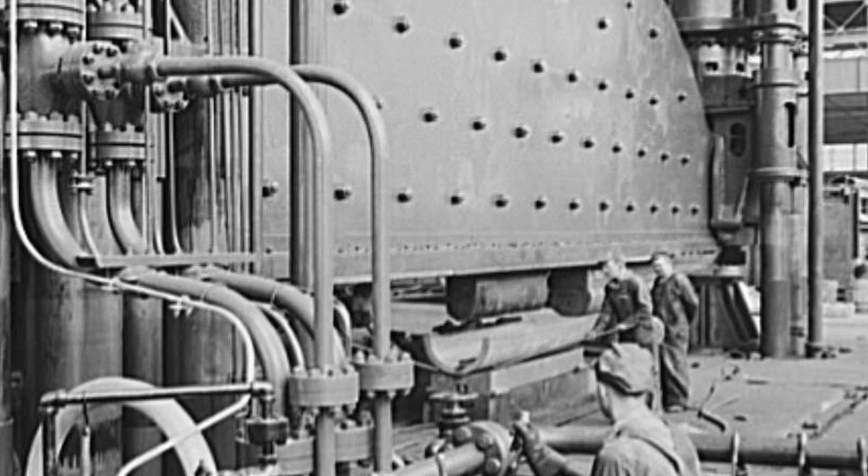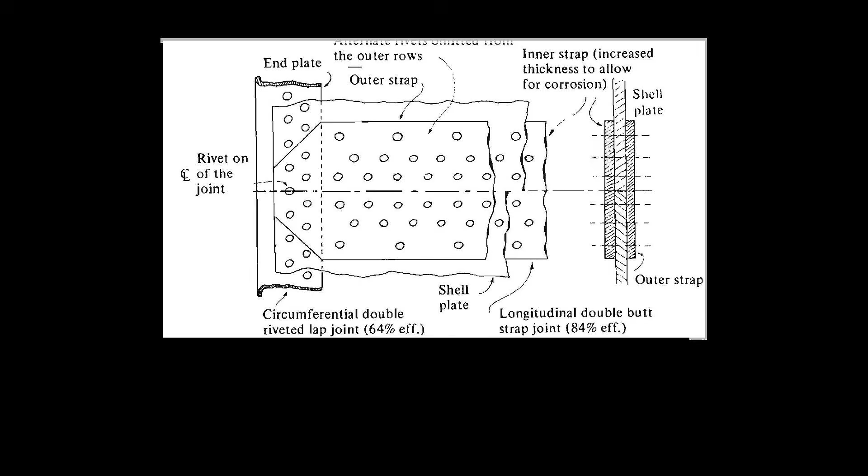He was a careful man. His wife would later tell investigators that he had been irritable for days because he was being forced to operate a boiler he did not trust at a pressure it was unequal to. The factory's newer boiler was down for routine maintenance, and Rockwell had been ordered to bring the old backup online—a 17-foot steel cylinder built in 1891 with riveted lap joints that hid their age between overlapping plates of metal.

He had lit the coal fire the night before, brought the boiler up slowly, and by early morning it was heating the building for 400 arriving day shift workers. At 7:45, the plant manager called Rockwell's office to report strange noises in the radiators along one wall. Rockwell had just stepped out. His assistant told the manager everything was fine.

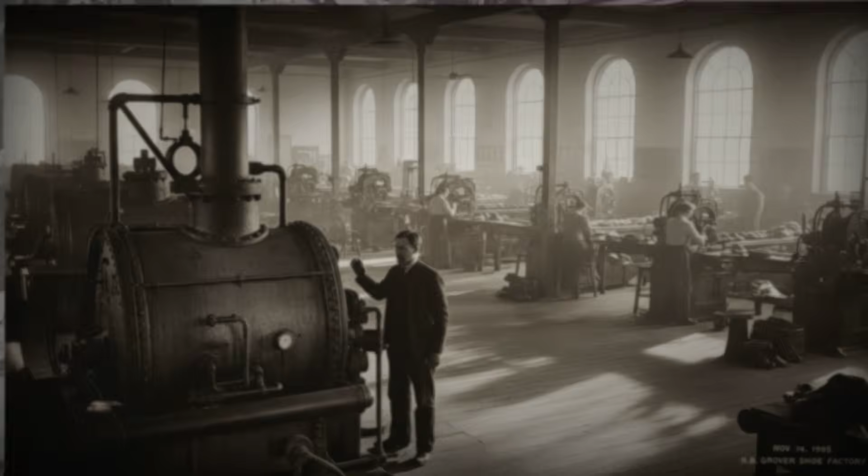A few minutes later, the boiler exploded. It rocketed upward through 3 floors and the roof. It struck the factory's elevated water tower on the way out, and the full tank crashed back through the building, collapsing the rear portion of the 4-story structure. The floors pancaked. The walls fell inward. Workers were pinned beneath broken beams and thousands of pounds of shoe manufacturing equipment.

Burning coals from the boiler's fire pit showered the wreckage, igniting broken gas lines. 300 windows, blown out by the blast, created a chimney effect that turned the ruins into a furnace hot enough to melt iron pipe. Then the naphtha exploded. Barrels of volatile industrial solvent stored in a wooden shed behind the boiler house detonated in a second blast, throwing sheets of flame across the debris and driving rescuers back.

People half a mile away could hear the screams. 58 people died. 150 were injured. 36 bodies were so badly burned they could never be identified. They were buried together in a common grave at Melrose Cemetery, where the city of Brockton erected a monument that still stands today. David Rockwell's body was found the next day in the boiler house—a charred corpse, a bent watch, 2 rubber heels, and a torn piece of clothing his wife identified as his. He had been sitting near the machine he did not trust when it killed him.

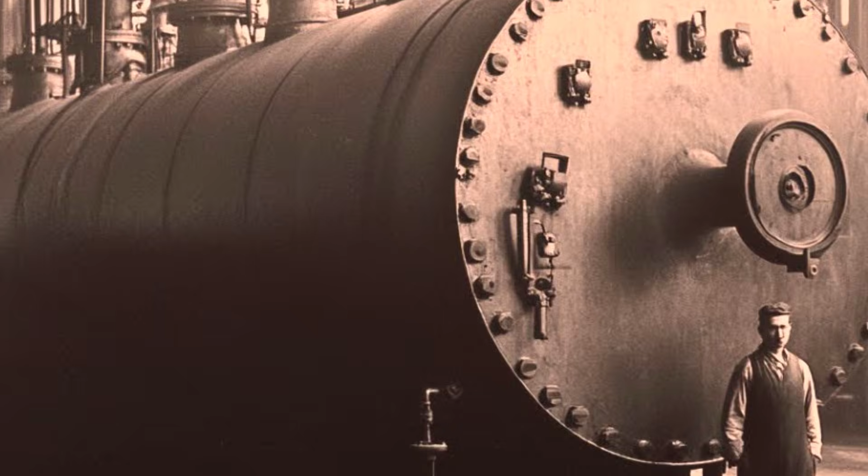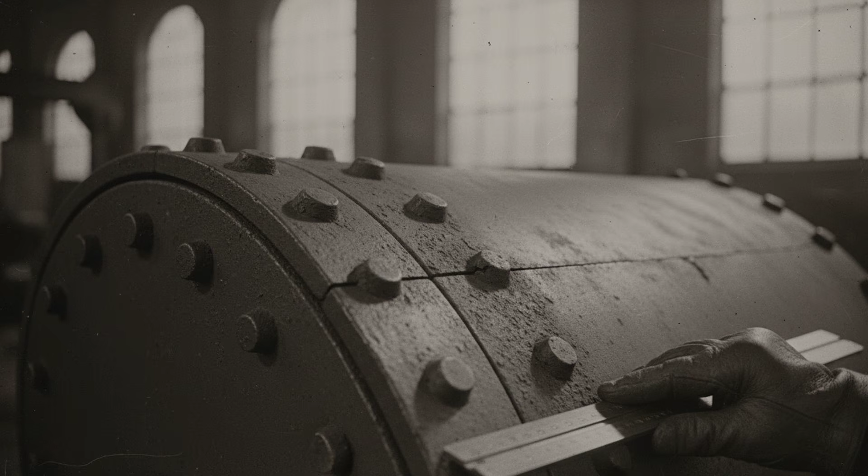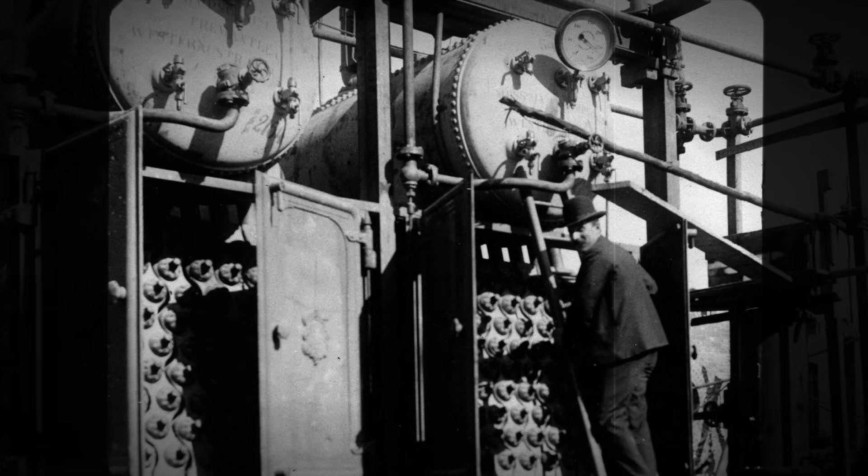The boiler that destroyed the Grover Shoe Factory was not unusual. It was not defective in any way that could be detected by the inspection technology available in 1905. Boiler inspectors who examined the wreckage found a crack in one of its riveted lap joints, hidden between 2 overlapping plates of steel where no inspector could see it. Experts characterized the boiler as old technology with a short remaining service life under high pressure, and then they noted that thousands of identical boilers were in service across the United States at that very moment.

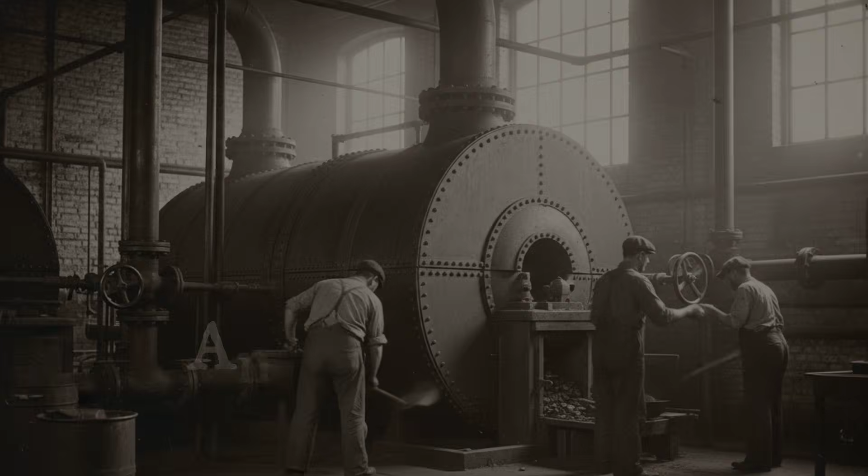The steam boiler is the most prolific killing machine in the history of American industry. It killed more workers than the punch press, more passengers than the Titanic, and more soldiers than most battles of the Civil War. And it did it so regularly, so predictably, and for so long that the people who owned the factories and the steamboats that used them came to regard the explosions as ordinary.

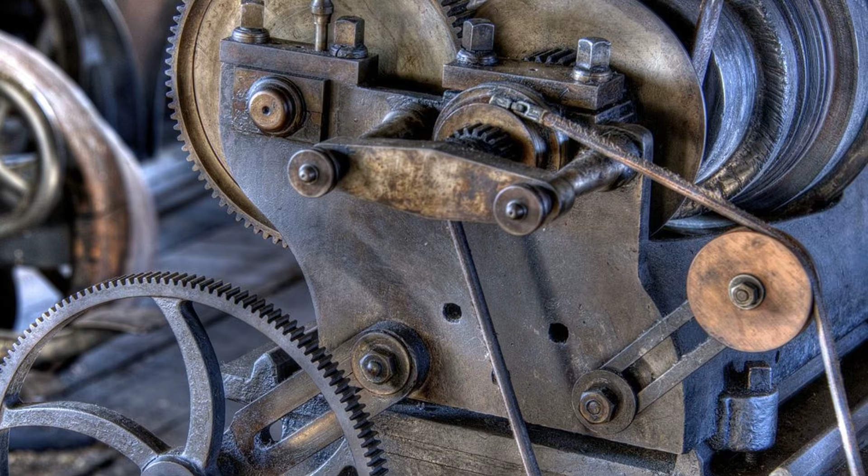Factory owners in the 1850s simply assumed their boilers would explode and that they would lose 1 or 2 workers when it happened. Insurance companies built their actuarial tables around the assumption that boiler failure was inevitable. The Hartford Steam Boiler Inspection and Insurance Company, founded in 1866, was conceived at a time when catastrophic boiler explosions were occurring at the rate of 1 every 4 days, not 1 every 4 months—every 4 days. In 1880, the year the American Society of Mechanical Engineers was founded, there were 159 boiler explosions in the United States. In the first decade of ASME, more than 2,000 boilers exploded.

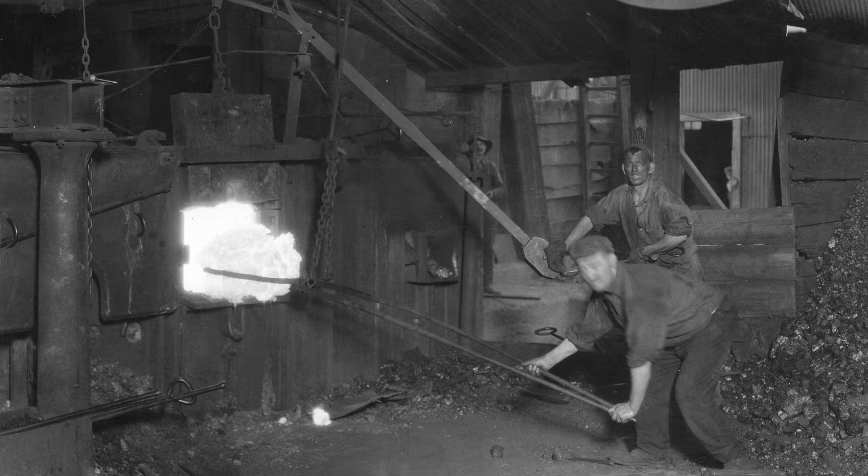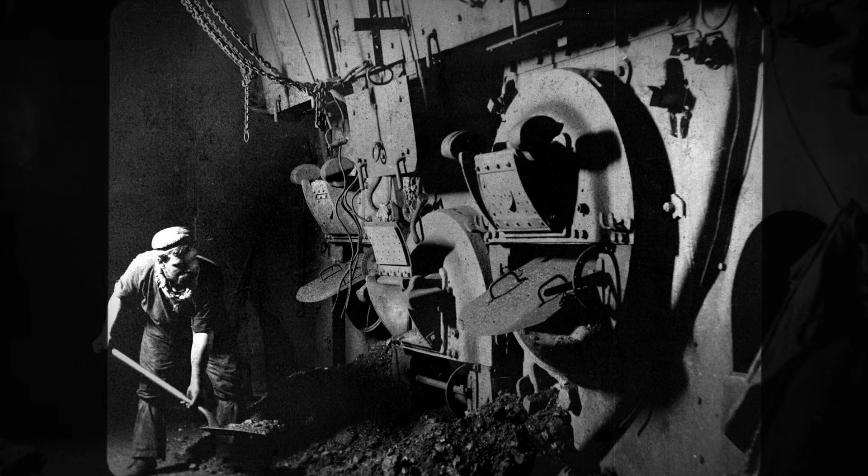From 1880 to 1890, 100,000 boilers were in service across the country, and the explosions kept coming because inspections were rare, construction standards did not exist, and operating guidelines were essentially voluntary. The boiler was not a machine that occasionally failed. It was a machine that was expected to fail. The only question was when, and how many people would be standing near it when it did.

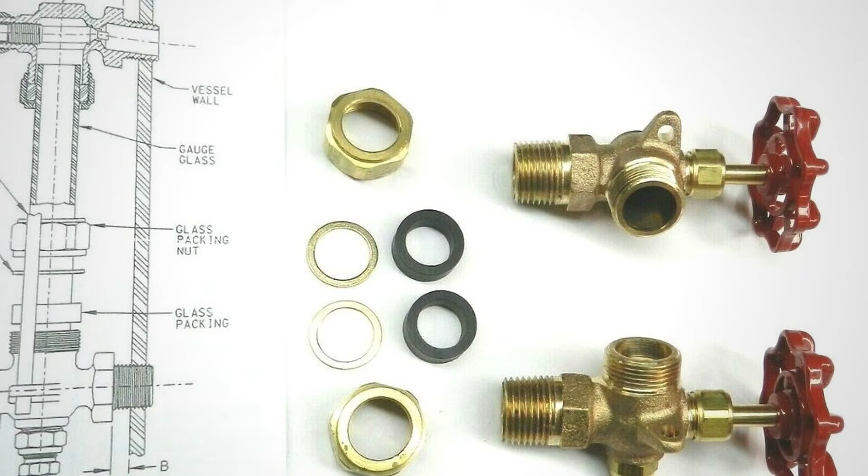To understand why the boiler was so dangerous, you have to understand what it is and what it does. A steam boiler is a closed vessel that heats water under pressure to produce steam.

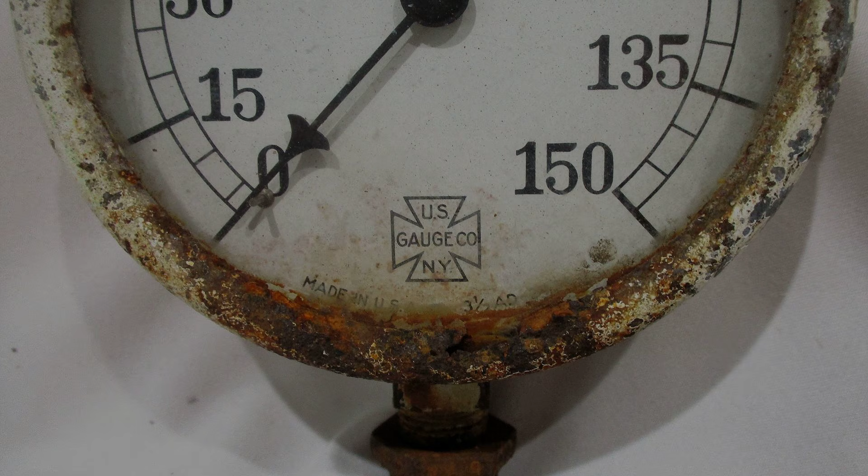The steam drives a piston, turns a turbine, or heats a building. The principle is the same one that makes a tea kettle whistle, except that a factory boiler operates at pressures between 40 and 150 pounds per square inch.

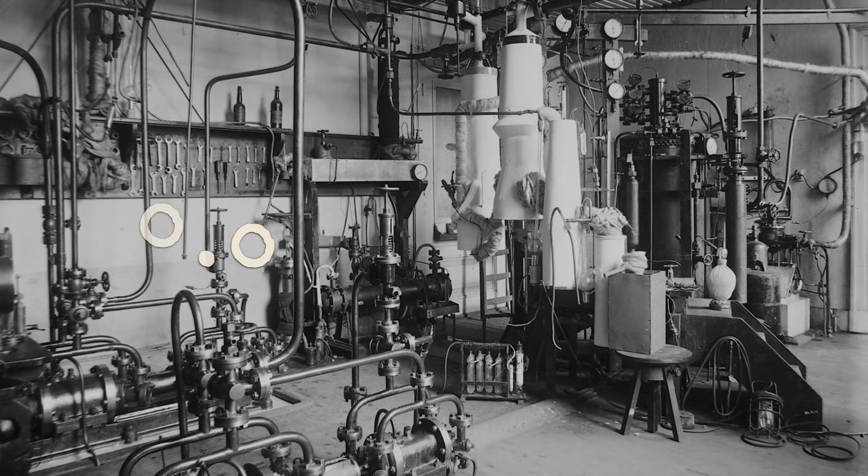The vessel contains hundreds of gallons of water. The water is superheated well above its normal boiling point, and the energy stored inside is equivalent to a significant quantity of explosive. When a boiler fails, the pressurized water instantly flashes to steam, expanding to roughly 1,700 times its liquid volume in a fraction of a second.

That expansion is the explosion.

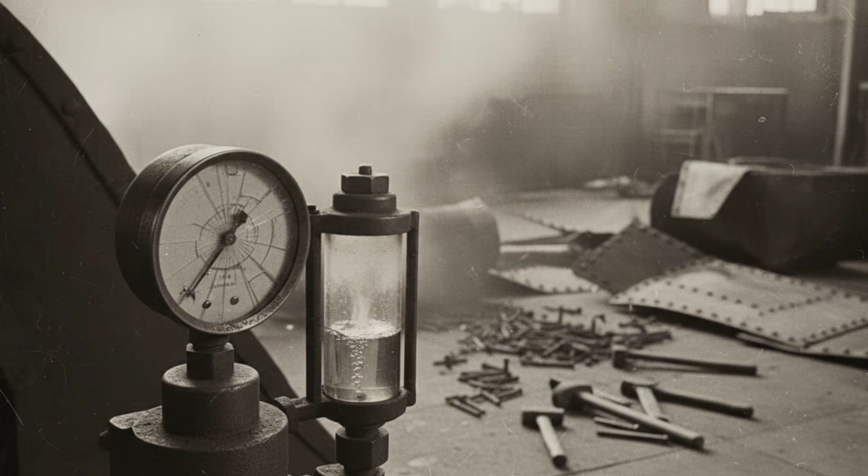The steel shell of the boiler becomes shrapnel. The superheated steam and boiling water become the blast wave. The boiler does not burn. It does not detonate like dynamite. It releases stored energy, and the result is indistinguishable from a bomb.

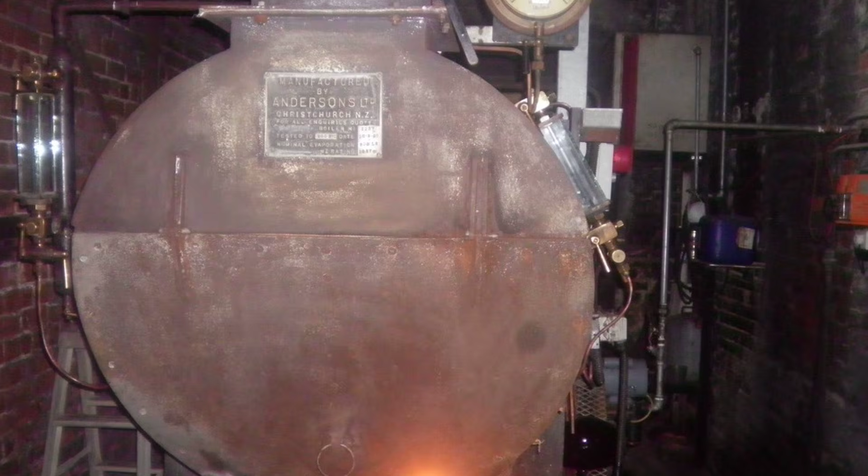Could you imagine standing next to a sealed steel container the size of a small room, knowing that the water inside is being held at temperatures and pressures that would kill you instantly if the metal gave way?

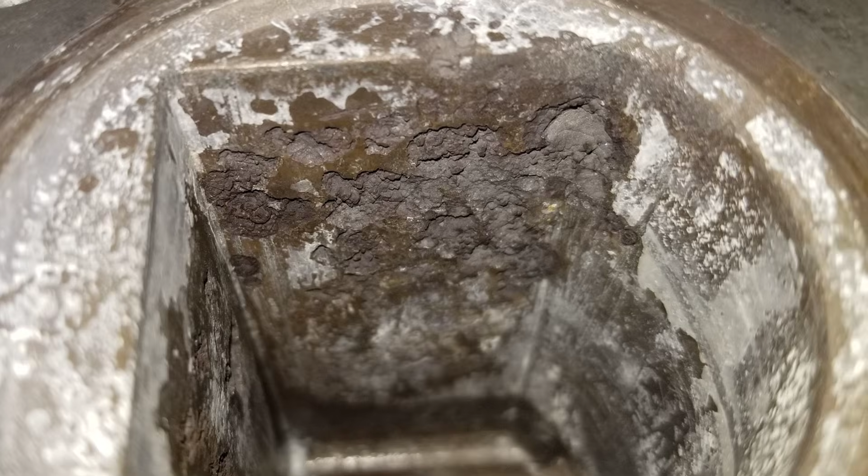The ways a boiler could fail were numerous, and for most of the 19th century, they were poorly understood. The most common cause was simple corrosion. Water inside the boiler ate away at the iron or steel plates over time, thinning them until they could no longer contain the internal pressure.

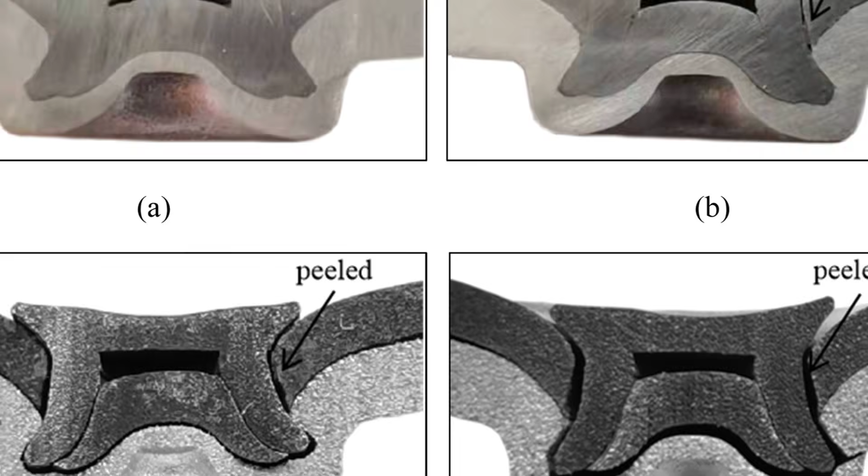But the corrosion was invisible. It formed along the edges of riveted lap joints between overlapping plates where inspectors could not see it. A boiler could pass an external inspection on a Monday and fail on a Tuesday because the flaw that killed it was sandwiched between two layers of metal.

This was exactly what happened at the Grover Shoe Factory. The crack was in the lap joint. It had been forming for years. Nobody could see it until the plates separated and the steam came through.

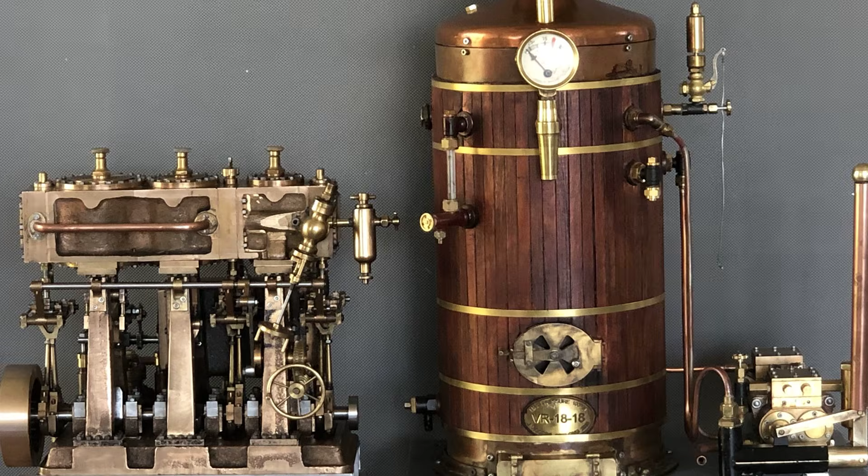Low water level was another killer. If the water inside the boiler dropped below the top of the firebox, the metal overheated. When the feed water pump eventually kicked in and cold water hit the superheated plates, the rapid temperature change could...

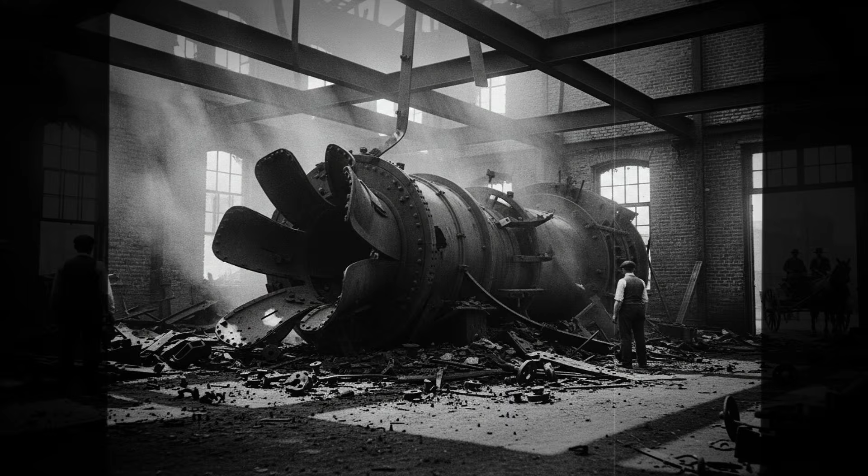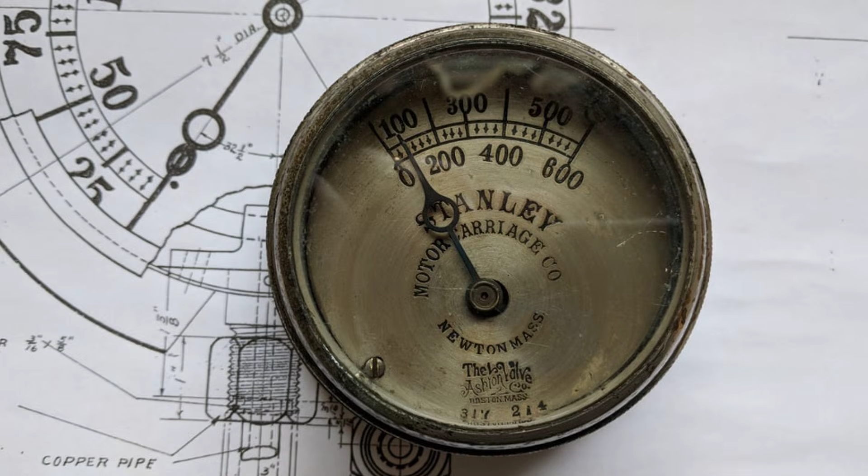crack the metal or cause the weakened plate to give way under pressure. Engineers who ran boilers understood this risk, and the experienced ones watched their water gauges obsessively. But boilers in the 19th century were often tended by poorly trained workers, sometimes by children, and the gauges themselves were unreliable.

A scale buildup on the inside of the boiler could insulate the metal from the water, causing localized overheating even when the water level appeared normal. Mud, sediment, and mineral deposits accumulated on the firebox crown and created hot spots that weakened the metal from the inside out.

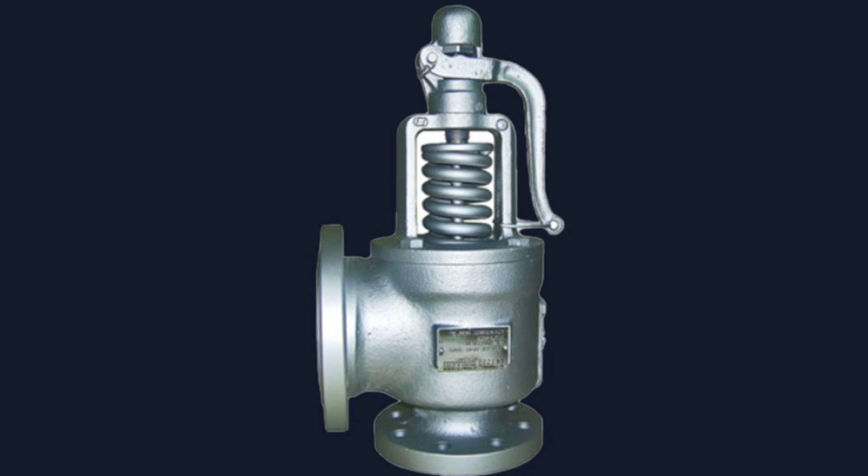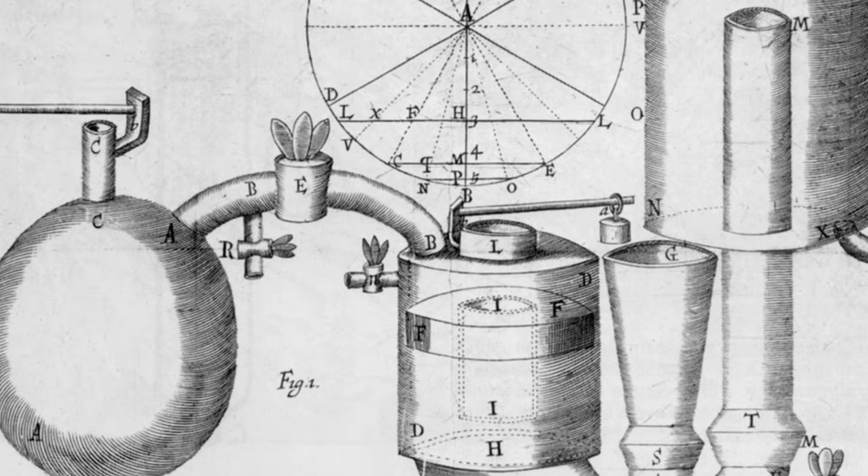Then there were the safety valves. Every boiler had one. It was a spring-loaded valve designed to open automatically when the internal pressure exceeded the boiler's rated limit, venting excess steam before the pressure could reach dangerous levels.

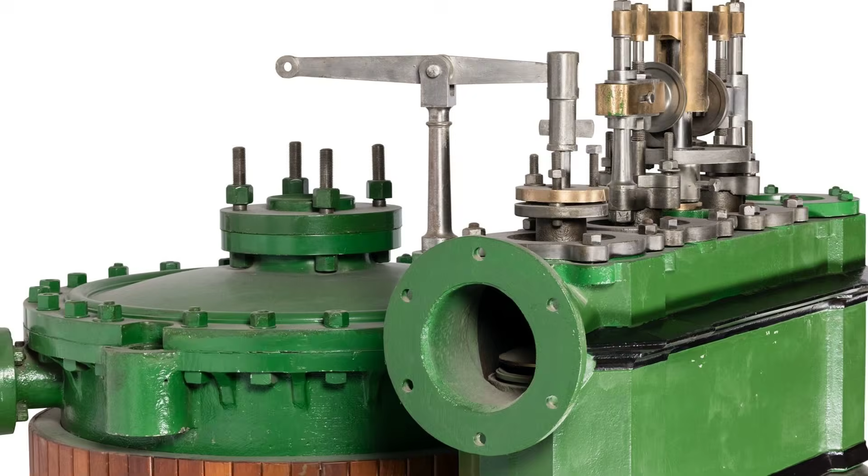The safety valve was the last line of defense, and it was routinely defeated. Factory owners who wanted more steam pressure would tighten the spring or add weight to the valve, raising the release point above the boiler's design limit.

Steamboat captains racing each other on the Mississippi would tie the safety valve shut with rope or wire to prevent it from venting steam during the race, squeezing every last pound of pressure out of the boiler to gain speed.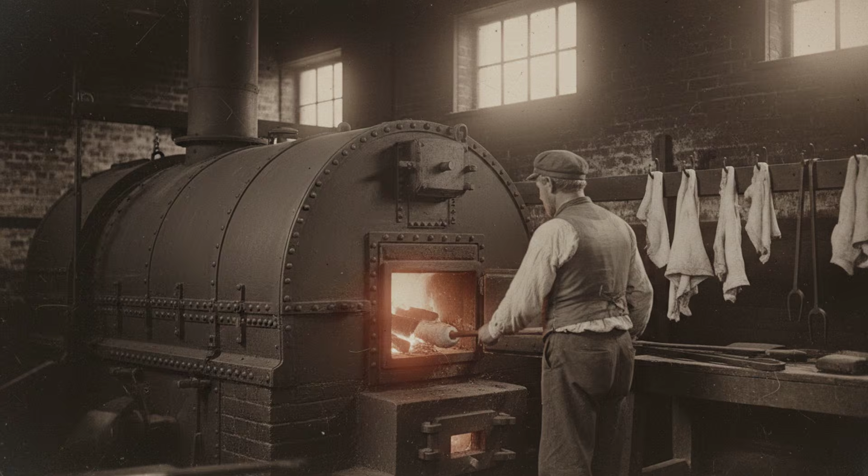A steamboat captain named Van, racing to New Orleans on the Lucy Walker in 1844, reportedly forced a slave at gunpoint to throw slabs of fat meat into the boiler's firebox to superheat the steam. The slave threw in the meat and then jumped overboard. The boiler exploded moments later.

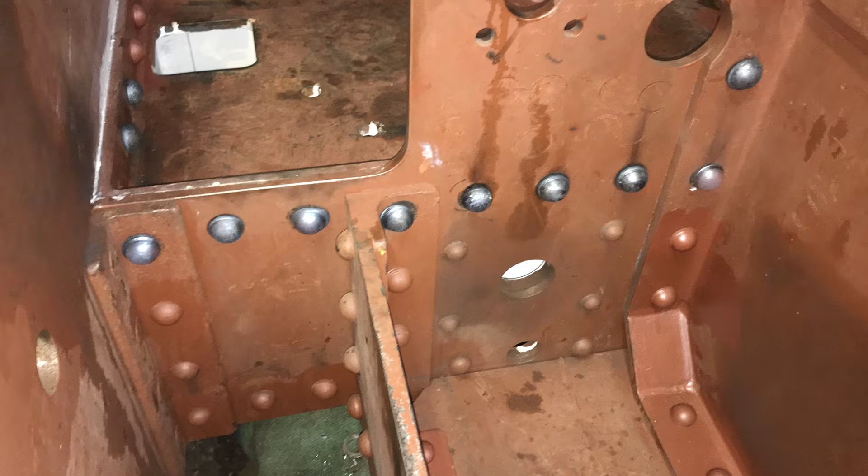Over 100 people died. The steamboats were where the carnage was most spectacular and most public. Before the railroads connected the country, steam-powered riverboats were the primary means of long-distance transportation in America.

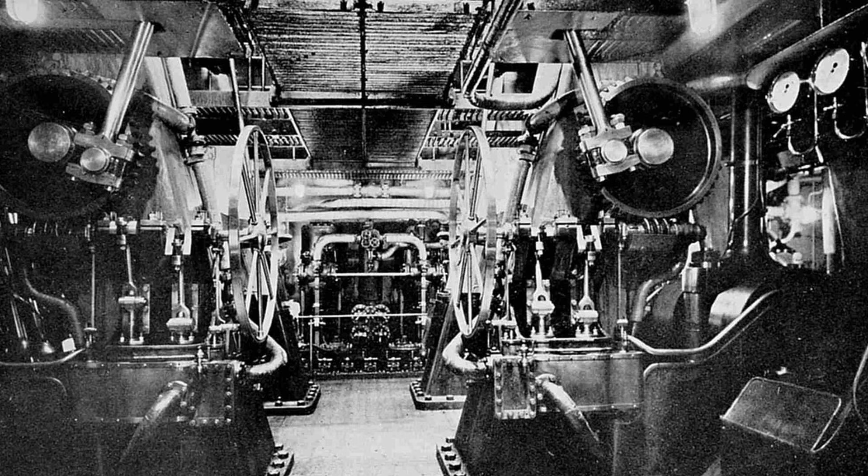They were also floating bombs. Between 1816 and 1848, 233 boiler explosions occurred on American steamboats. Between 1825 and 1830 alone, 42 explosions killed 273 people.

Between 1810 and 1840, nearly 4,000 people died on the Mississippi River from steamboat boiler failures. The deaths were not limited to workers and low-fare passengers.

A senator died in an explosion on the Red River. Three congressmen died in separate blasts on the Ohio River and the Atlantic Ocean. The former mayor of New York City was killed in a boiler explosion aboard the Hudson River steamer Henry Clay in 1852.

Mark Twain's brother, Henry Clemens, died from injuries sustained in the Pennsylvania explosion on the Mississippi in 1858. The event haunted Twain for the rest of his life. He wrote about it with the precision of a man who could not stop seeing it.

Four of the eight boilers exploded with a thunderous crash, he recalled, and the whole forward third of the boat was hoisted toward the sky. Shrieks and groans filled the air. An iron bar had been driven through one man's body. The worst was the Sultana.

On April 27, 1865, just weeks after Lee's surrender and Lincoln's assassination, the steamship Sultana was chugging up the Mississippi with more than 2,200 people aboard, most of them Union soldiers just released from Confederate prison camps. The boat's legal capacity was 376 passengers.

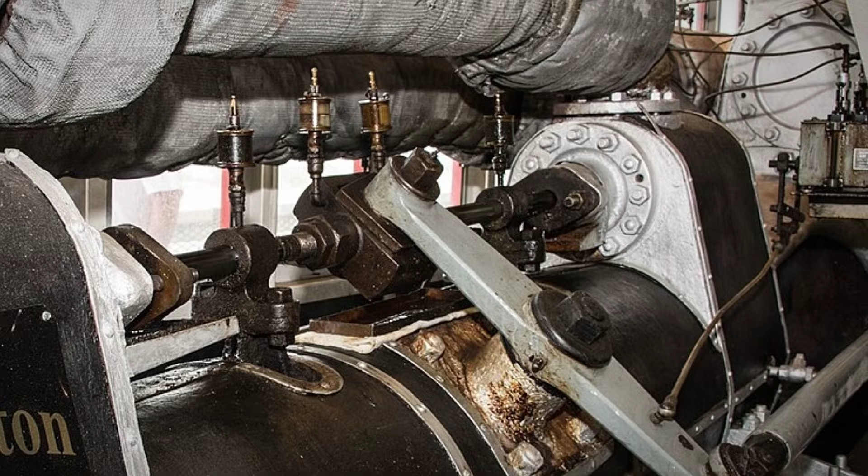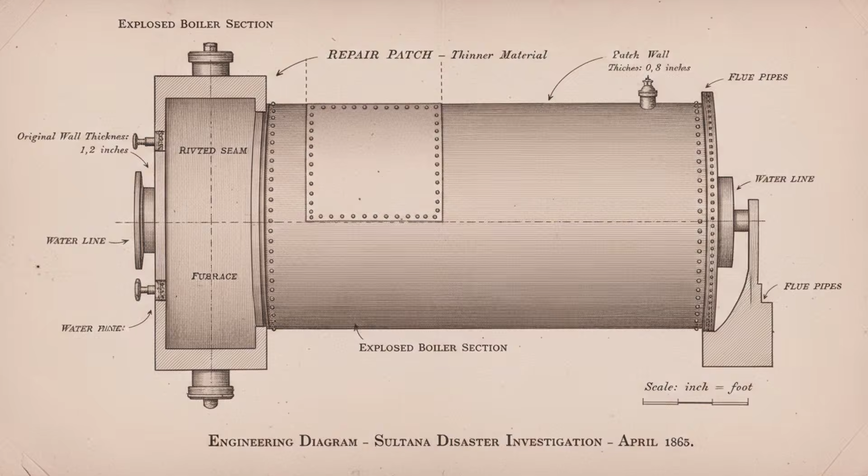One of the four boilers had been bulging and leaking since New Orleans. The captain, eager to collect the government contract payment of $2.75 per enlisted man and $8 per officer, ordered a hasty patch rather than waiting 3 to 4 days for a proper repair. The patch was thinner than the original boiler wall.

Two days later, at 3 in the morning, 7 miles north of Memphis, the patched boiler gave way. The failure ruptured two more boilers. The Sultana burned to the waterline in 15 minutes. An estimated 1,800 people died, making it the deadliest maritime disaster in United States history, worse than the Titanic by nearly 300 deaths. The nation barely noticed. Newspapers were covering Lincoln's funeral train and the hunt for John Wilkes Booth.

But the factory boiler was quieter and more persistent than the steamboat. It did not make headlines unless it killed dozens at once. A factory boiler that exploded and killed one or two workers was a local story, reported in the town newspaper and forgotten by the following week. The worker's family received nothing.

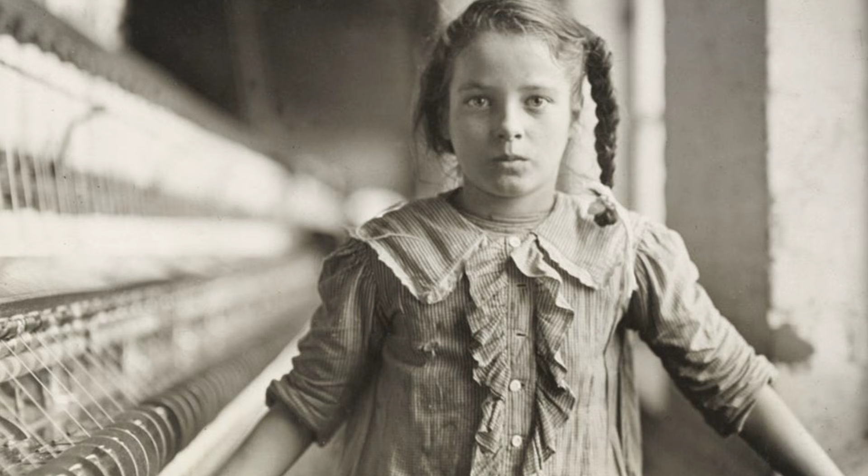Before workmen's compensation laws appeared in the United States in 1910, the only recourse for an injured worker was a lawsuit against the employer. Employers had three legal defenses so reliable they were called the unholy trinity: contributory negligence, the fellow servant rule, and assumption of risk.

If the worker was even partly at fault, the claim failed. If a co-worker's action contributed, the employer owed nothing. And if the danger was considered a normal part of the job, which operating a boiler certainly was, the employer was not liable. Only 1 in 8 injured workers ever received compensation through the courts.

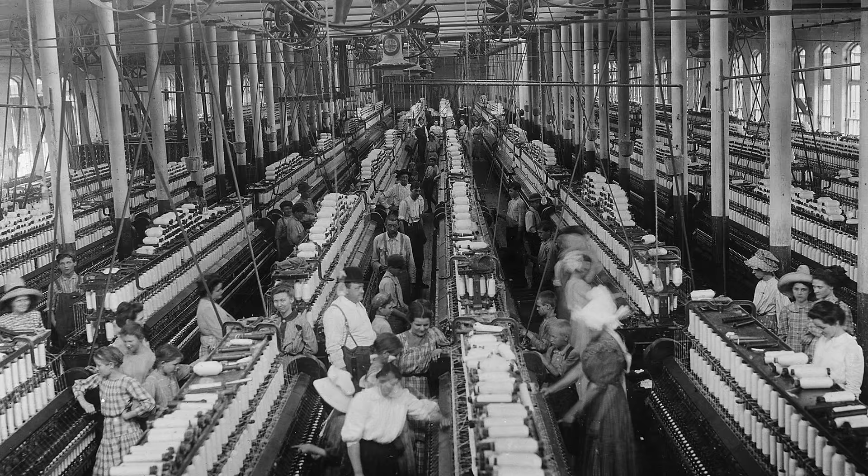Factory owners understood the math. It was cheaper to let the boiler explode and fight the lawsuit than to slow down production, lower the pressure, and maintain the equipment. Between 1870 and 1910, there were over 10,000 major explosions inside American factories, and the boiler was responsible for a significant share of them.

The people who finally did something about it were not regulators, they were insurance men. In 1854, a boiler at the Fales and Gray Car Works in Hartford, Connecticut exploded, killing 21 workers. The disaster shook the city.

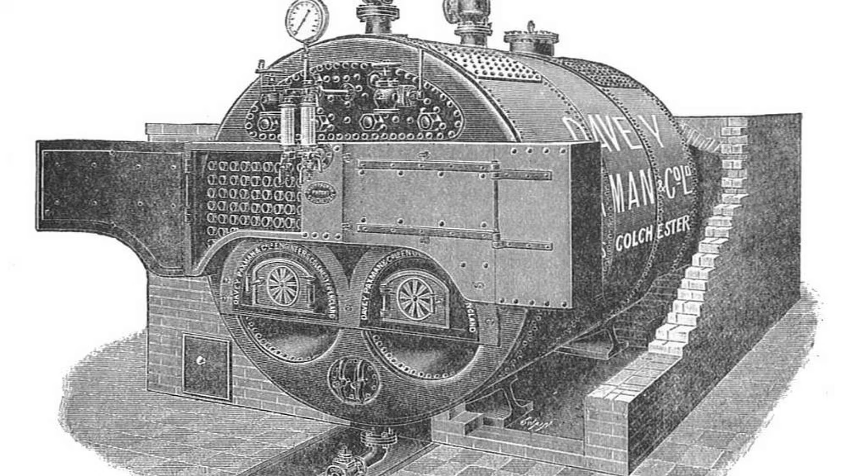A group of Hartford businessmen associated with the use of steam power had already been meeting informally as the Polytechnic Club, discussing matters of science relative to everyday life. With boiler explosions becoming such a central part of everyday life, their conversations kept returning to the same question: why did boilers keep exploding, and could the explosions be prevented?

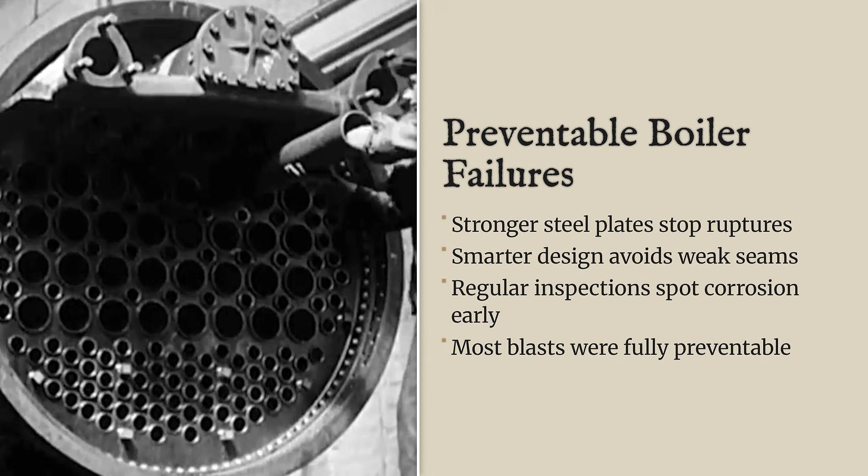They concluded that the answer was straightforward. Boilers exploded because the pressure inside exceeded the ability of the vessel to contain it. Better materials, better design, and periodic in-service inspections for corrosion and wear would prevent most failures. They so believed in this view that they were willing to put money behind it.

In 1866, they founded the Hartford Steam Boiler Inspection and Insurance Company, an organization built on a radical premise: combine insurance with mandatory inspection. The insurance would function as an incentive to inspect, and the inspection would function as a guarantee of safety. It was the first time anyone in America had systematically attempted to prevent boiler explosions rather than simply paying for the damage after they occurred.

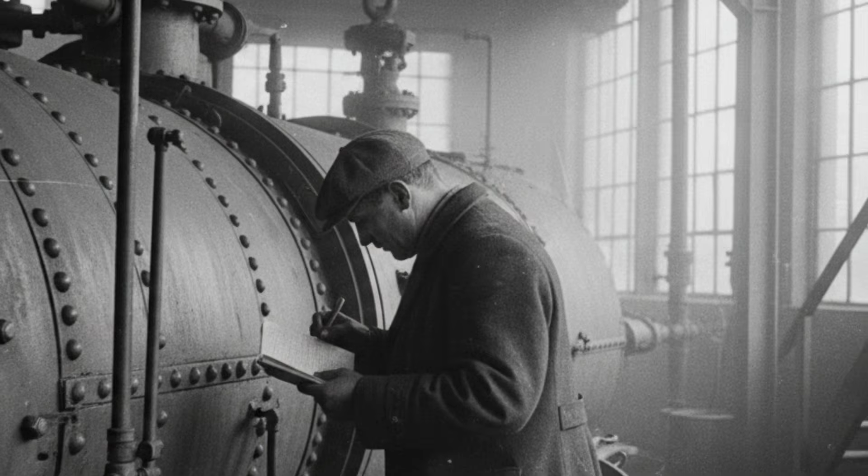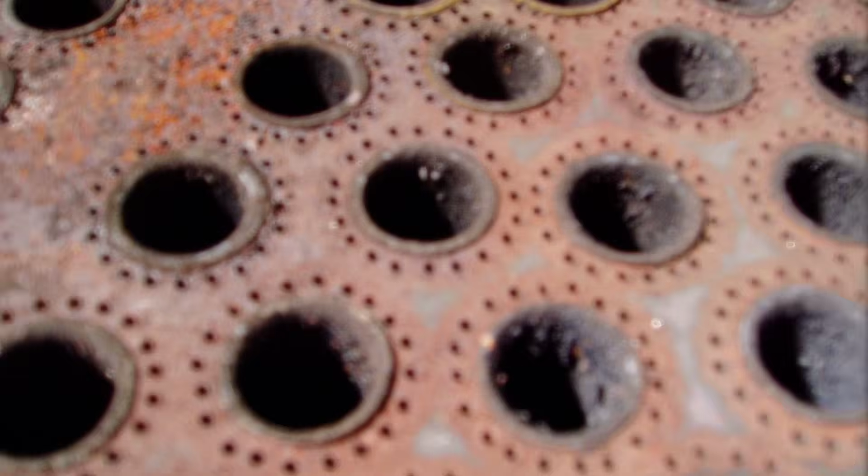Hartford's inspectors fanned out across the country, examining boilers, finding cracks, ordering repairs, and building a database of failure modes that no one had ever compiled before. They found boilers with corroded plates, leaking joints, safety valves that had been tampered with, water gauges that read incorrectly, and firebox crowns coated in scale so thick the metal was glowing red behind it.

They published their findings in a quarterly journal called The Locomotive, which began in 1867 and is still published today. Year after year, the inspectors documented the same problems. Year after year, the boilers kept exploding. Hartford could only inspect the boilers of its own customers, and there was no law requiring anyone else to inspect anything.

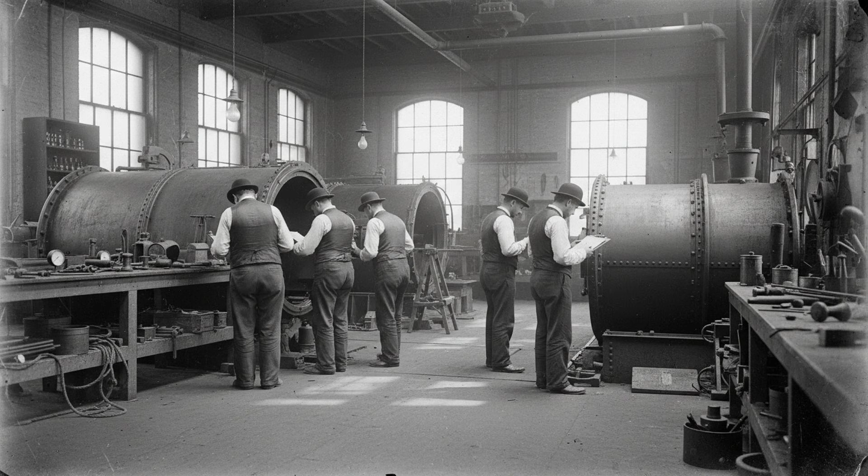The Grover Shoe Factory disaster changed that. When 58 people died in Brockton on a Monday morning in March 1905, and another fatal boiler explosion struck a shoe factory in Lynn, Massachusetts the following year, the state could no longer pretend the problem was being managed. Massachusetts established a board of boiler rules, and in 1907 passed an act relating to the operation and inspection of steam boilers, the most stringent boiler safety legislation in the country.

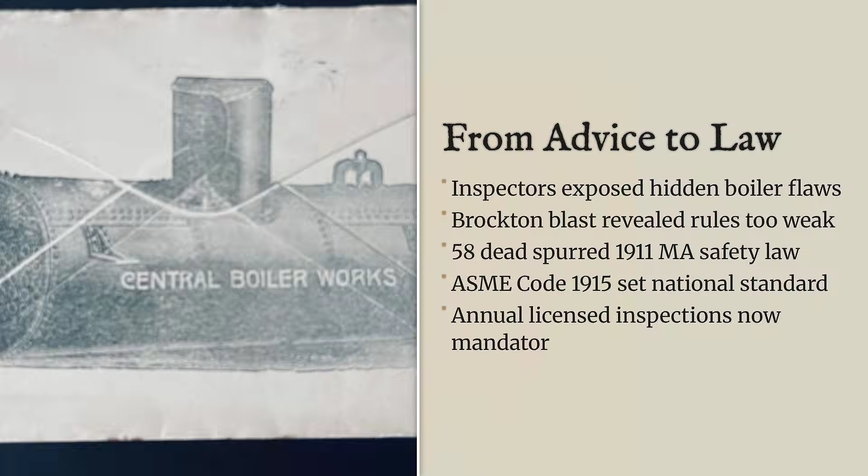The law required design certification, material standards, periodic inspections by licensed engineers, and documentation of maintenance histories. It was the first time an American state had imposed comprehensive, enforceable rules on boiler construction and operation. But one state was not enough.

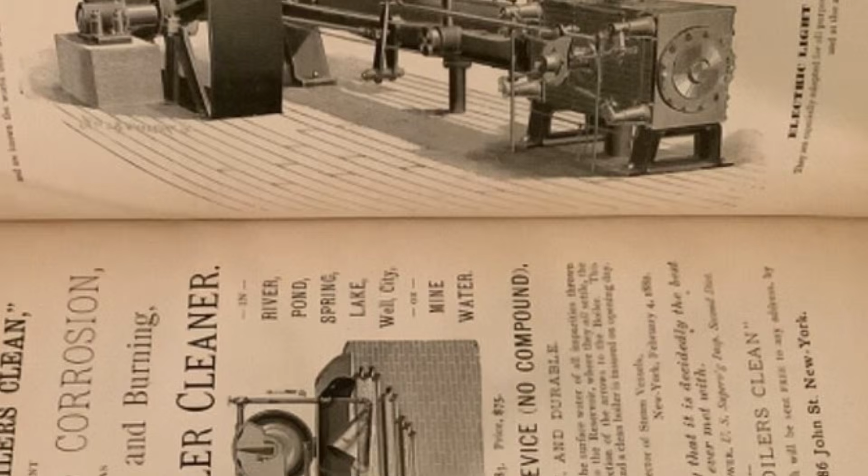ASME had been founded in 1880 in direct response to the epidemic of boiler explosions, but for three decades it had issued only voluntary guidelines. Manufacturers and railroad managers opposed mandatory regulation as needless government interference. It took the continued accumulation of bodies to overcome their objections.

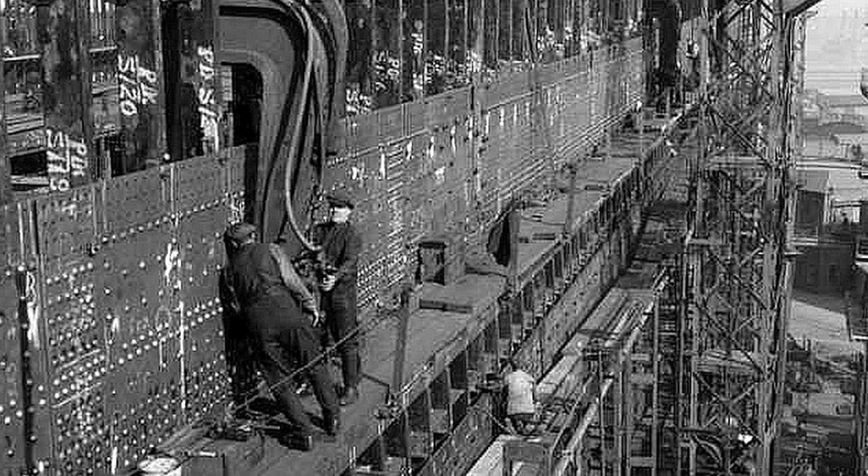In 1911, ASME formed a Boiler Code Committee. In 1915, the first edition of the ASME Boiler and Pressure Vessel Code was published. It was 114 pages long, 5 inches by 8 inches, a single slim volume. The code established uniform rules for design, fabrication, materials and testing.

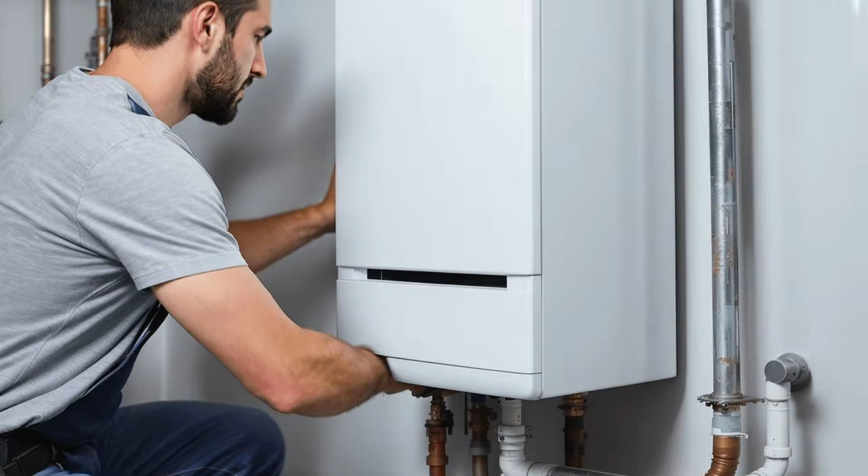States began adopting it. Ohio in 1911, others followed. A National Board of Boiler and Pressure Vessel Inspectors was created in 1919 to enforce consistent standards across state lines. It worked. The explosion rate dropped, not immediately and not uniformly, but the trajectory bent downward and stayed there.

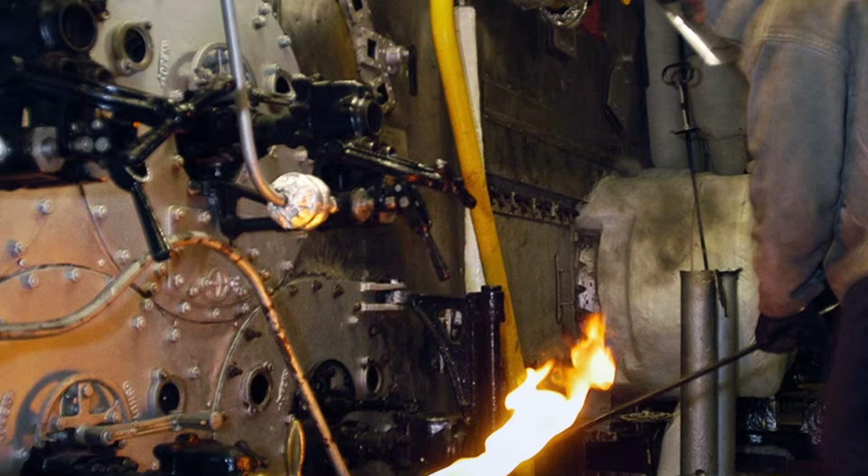Boilers that met the code were stronger. Boilers that were inspected were caught before they failed. Boilers that were maintained lasted longer and failed less violently. The code grew. Today it fills 28 books and more than 16,000 pages.

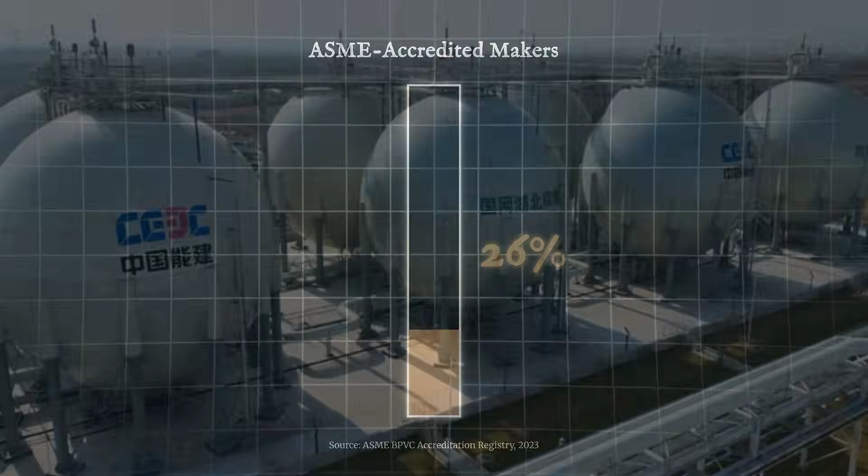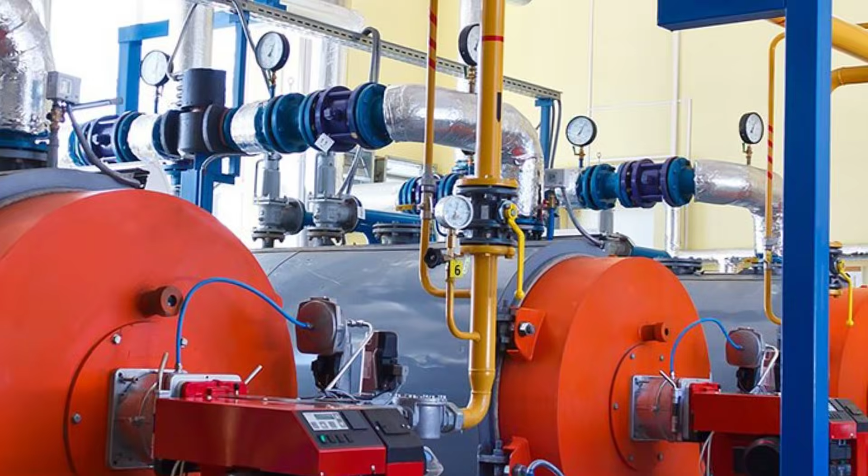49 of 50 states and all provinces of Canada have adopted sections of it by law. Over 25% of the companies accredited by ASME to manufacture pressure vessels are located outside the United States and Canada. The slim volume that started as a response to American factory workers dying in American factories now governs boiler safety across the industrialized world. But the boiler is still there.

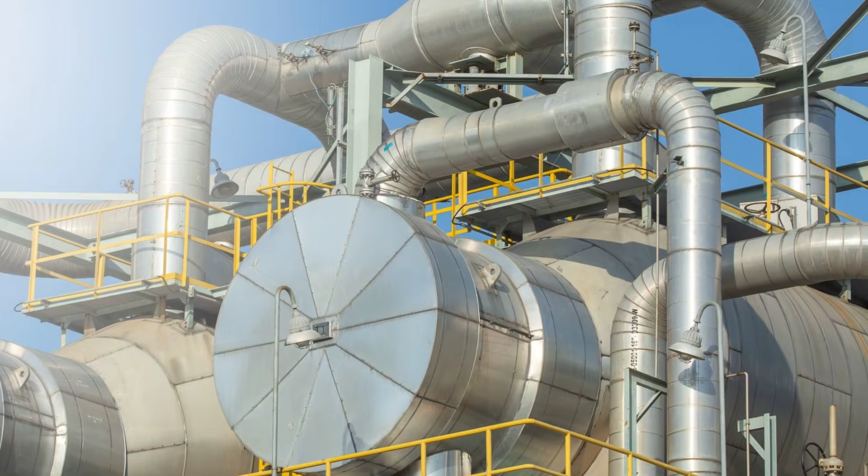It is in every building heated by steam. It is in every power plant generating electricity from fossil fuels or nuclear fission. It is in every industrial process that requires heat under pressure. The fundamental physics have not changed.

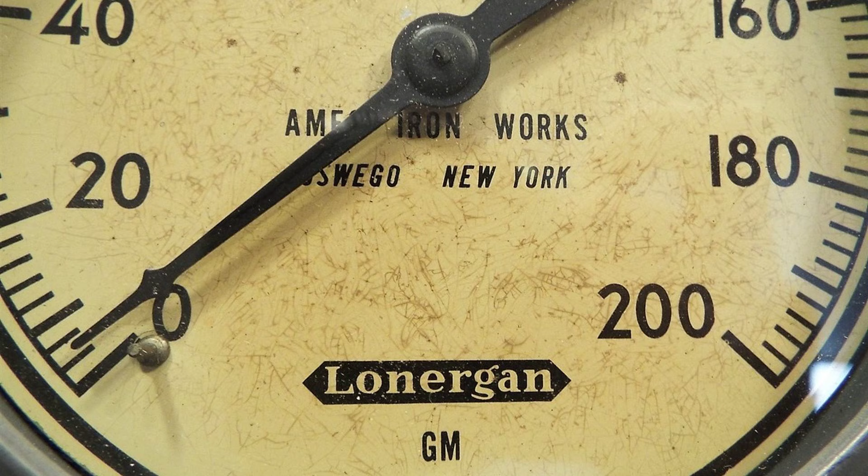Water heated in a sealed vessel produces steam. Steam under pressure stores energy. If the vessel fails, the energy releases all at once.

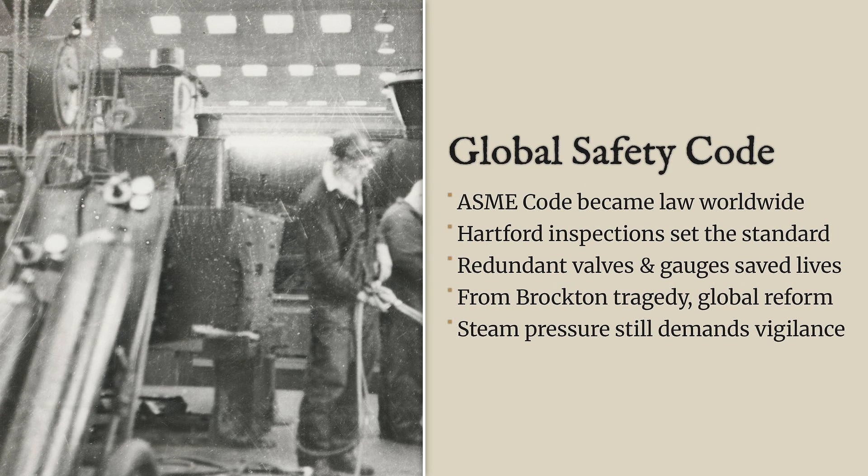The ASME code, the Hartford inspections, the fusible plugs and safety valves and pressure gauges and water level indicators, all of them exist because for 100 years the machine was allowed to operate without rules, without oversight, and without anyone counting the dead. In the years after the Grover disaster, the city of Brockton held a funeral.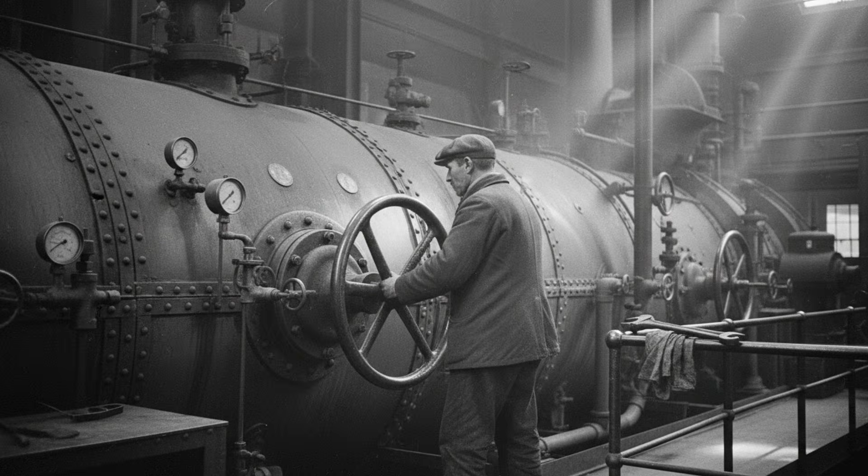A young boy walked at the head of the procession carrying David Rockwell's clarinet, draped in black crepe. Rockwell had been a musician. He had been an engineer with a first-class license and a dozen years of experience who understood the machine he was operating better than anyone else in the building. He had told his wife the boiler was being pushed beyond what it could handle.

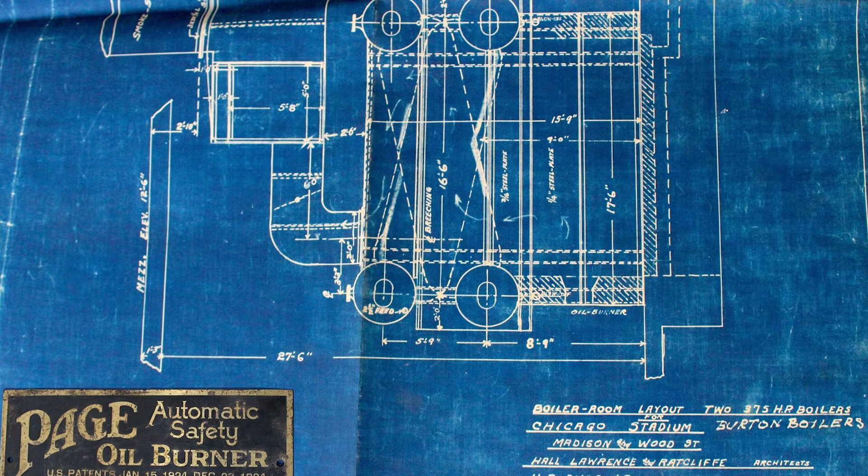The factory's management told investigators that the amount of pressure on the boiler was not a matter in which factory officials interfered. They said the engineer took his orders from the Hartford Boiler Insurance Company. They said if he overworked the boiler, he did it without their knowledge. They said they did not even know why he used the old boiler that week instead of the newer one.

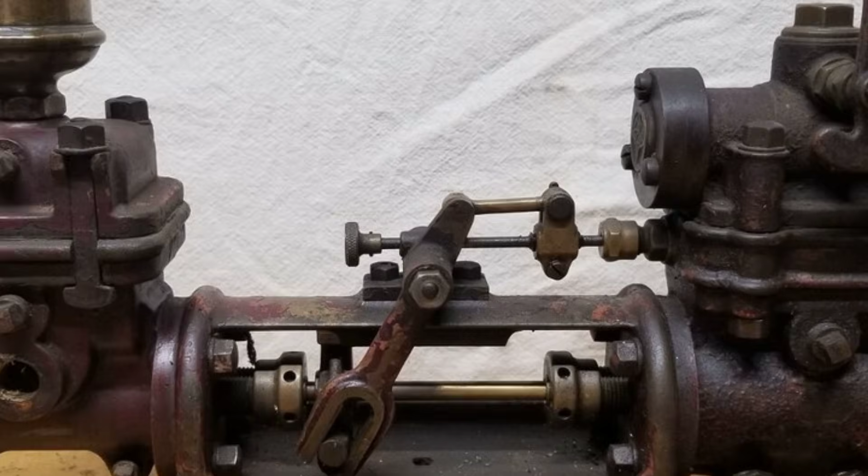Rockwell was dead. He could not respond. His wife had told them everything she knew. The crack was in the lap joint, hidden between two plates. The boiler had been inspected in December and found in apparent good condition. The technology to find that crack did not exist.

A worker so dazed by the explosion that he walked away from the factory, applied for a job at another shoe factory across town, worked an entire shift, and went home that evening to find his family mourning him.

36 bodies, so badly burned they could never be identified, buried together beneath a stone that lists only their names, some of them only guesses.

George Smith, who despite dying from his injuries managed to shove a woman within reach of rescuers. A 14-year-old boy named Harold Lawrence who pulled his own father out of the wreckage.

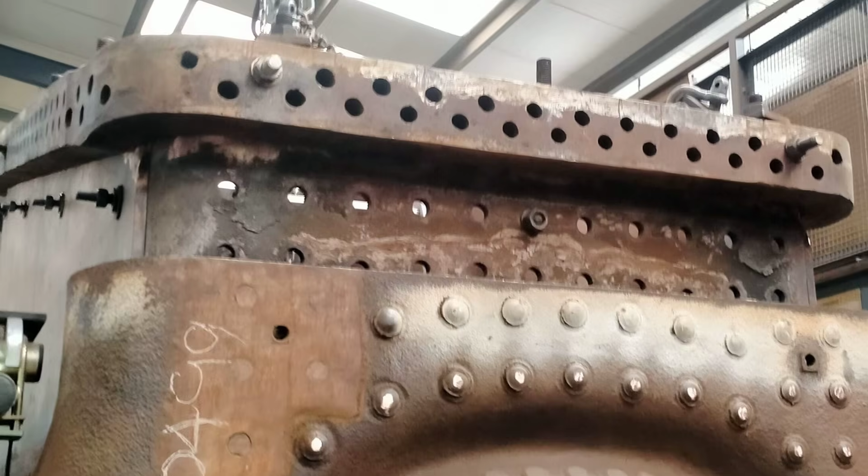A priest from St. Margaret's Church who ran into the burning building and lifted heavy floor joists off of trapped workers and went back in again until the building fell on him and he was carried out with injuries of his own. One boiler, one crack, one Monday morning.

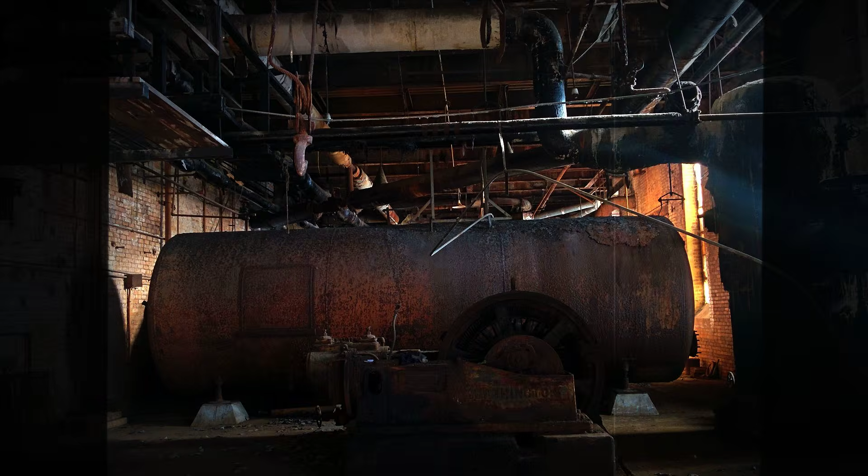The same kind of boiler, with the same kind of crack in the same kind of factory, in every industrial city in the United States. The only thing that changed was who stood near it when it let go.